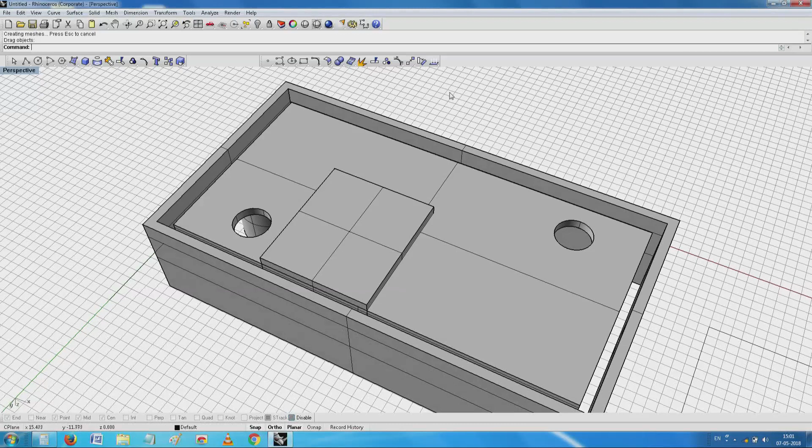So you see here, I have two options. One is build a heat sink in the small gap which I have already shown here. I have a small gap here, you have seen this. So I have two options: I can make a heat sink which is wrapped around and completely goes off inside and gets attached here and then close it, or alternatively, if the amount of area that is available makes the thing easier, all I need to do is make a cover for this device which is completely made of a conductive material.

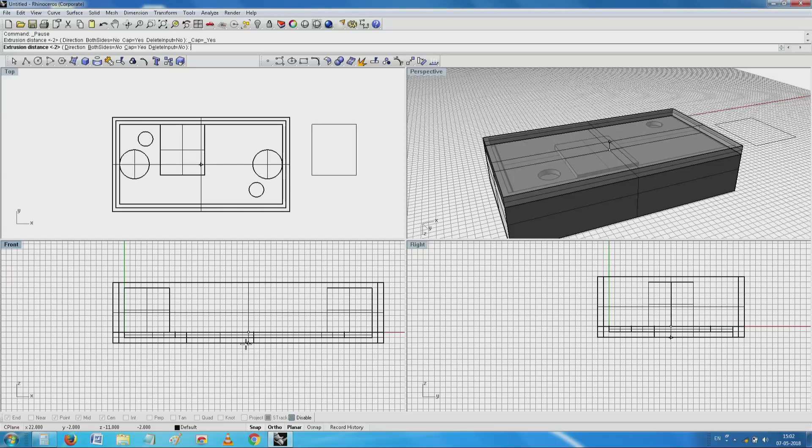See there, it is a beauty. I have now a small aluminum cover which is happily sitting on top of this, and I can play with it. In this case, now more by accident and less by intention, the thickness has become a little more, but still it suits me.

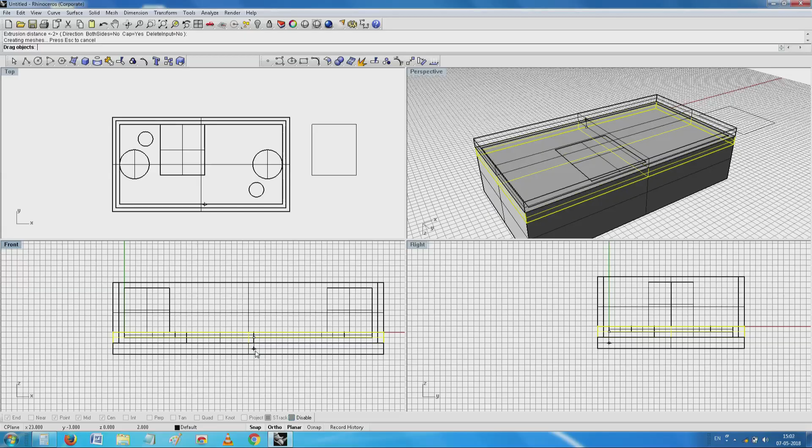You have seen this. Now I have got a cover which is happily sitting on top of it, and at the bottom I have a heat sink, and the whole thing is attached together. Now it is very much possible for me to take this, attach it to this, and union the thing.

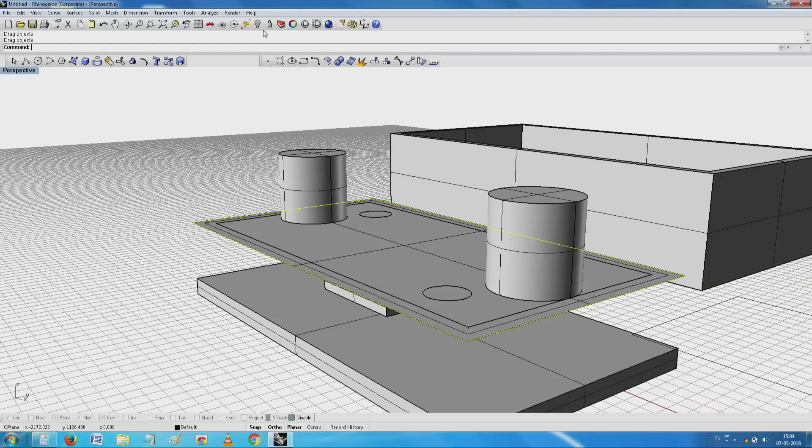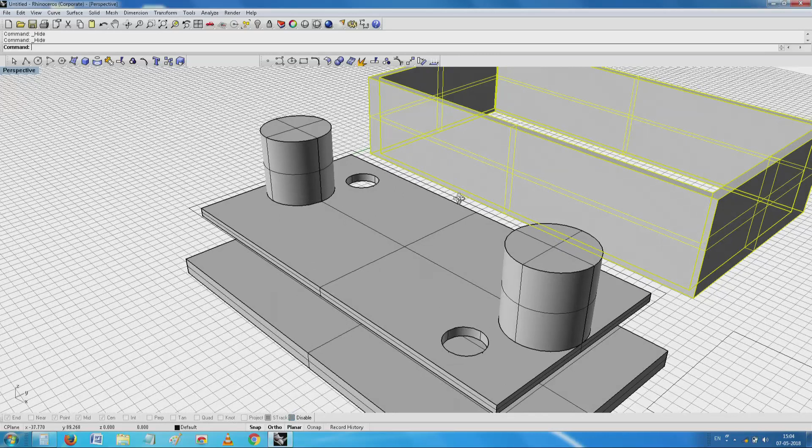See, I have all the necessary things. I have a plate with an aluminum heat bridge, then I have my printed circuit board on top of it, and then I have a cover on top of it. Now from here onwards, it makes sense to figure out how I take the other decisions related to my project here.

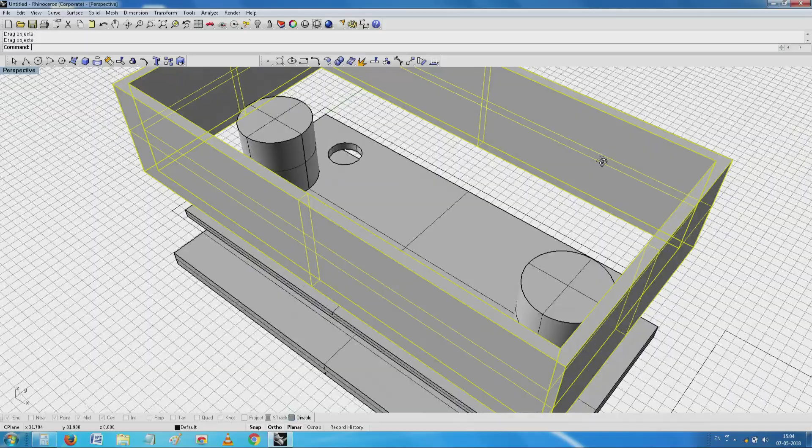Obviously one of the important things is how do I close the whole thing, how do I clamp it. These two are obviously metallic objects, and this is the 3D printed item. All I need to do is make a cover here and probably make some arrangement by which these two mounting holes are there. I get it made in this. I will just show you quickly, and then after that I will take a short break.

You see I have a hole here. I just need to make one more circle. See, I have a beautiful circle here, and I need to make a small pilot hole in that circle and make an extrude.

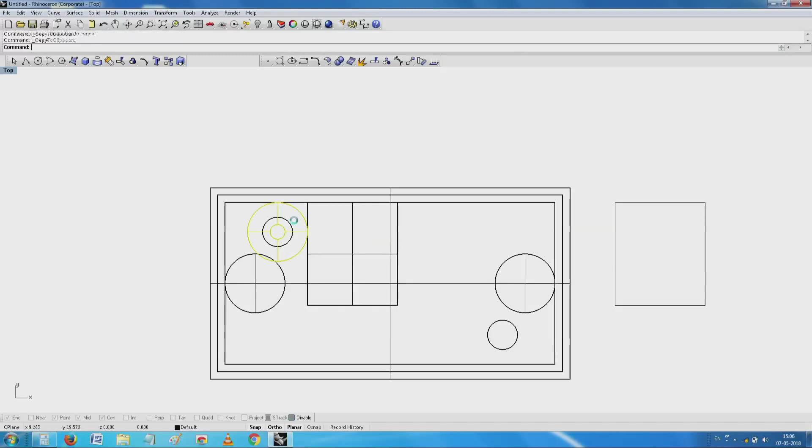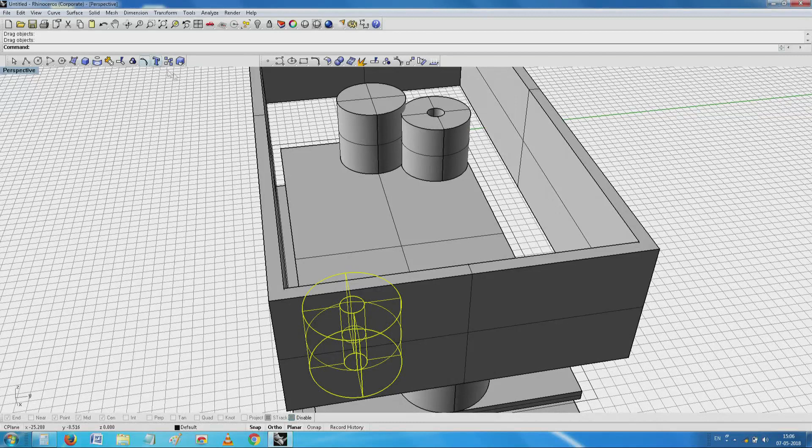See, I have got a beautiful mounting detail here which I can make. See, I have two beautiful circles which are nicely part of this, except that you will notice already the first goof up. I have done a small goof up here. You have seen this. This is interacting there and it may be creating problems for me.

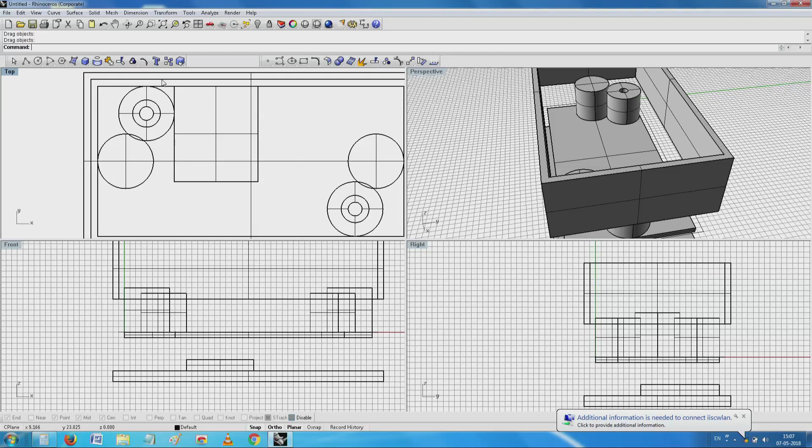That is where you have an advantage when you are working with CAD. Several options: one is, depending on the strength, this is decided. So what to do? You can just cut off this portion, see that it aligns perfectly. Alternatively, I can make this a little smaller, critically small, but then I was hoping this will touch here. So this is where I now try to remove only the details which I need. All other things I will hide. Now start playing with it.

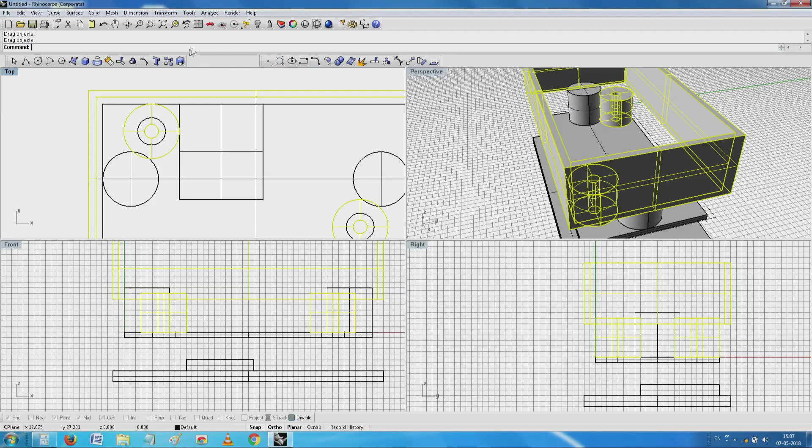See, I have got two mounting holes, I have got the outer thing. I need to do something so these are attached together. So this is where our ingenuity and a little bit of craft come about, saying how do I join them here. In the case of injection molding, if you remember, there was always an issue about maintaining constant thickness. In the case of our thing, that is not the main issue. So it is very much possible for me to just join this here, so that material required from the support point of view is avoided.

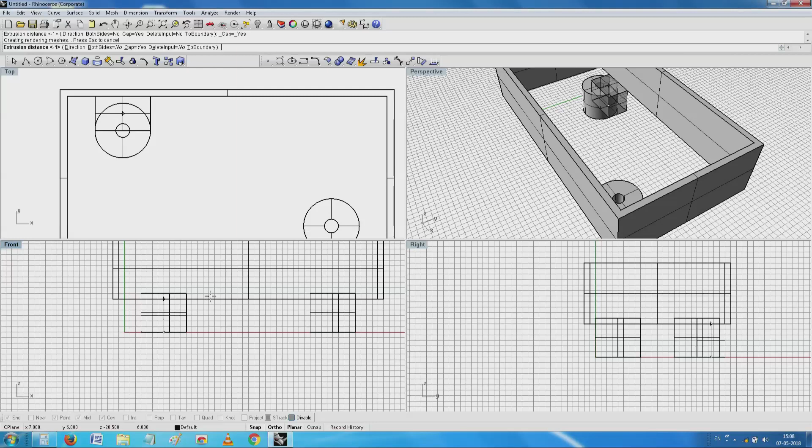So what I will do is now try to make one more small surface, corner to corner I start here, and extrude this. See, beauty. Without too much of a problem, I have this, and then why did I make it solid compared to the other thing?

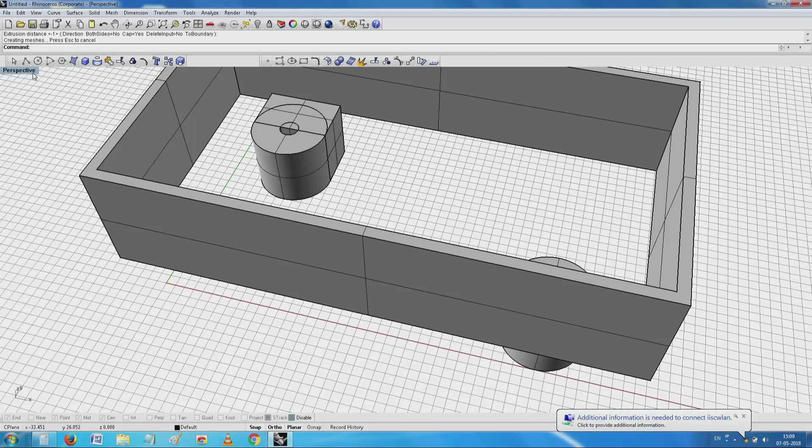This is where one of the detailing which is very much part of any 3D printing is required. If you make parts similar to what you would do with injection molding, we end up with certain priorities which are very different. In our case, we need to maintain such that the support material is not required. The main material is anyway consumed. But in the case of our injection molded parts, constant thickness has to be maintained, otherwise injection does not take place. So I have these two beautiful bosses here, and then I boolean these things.

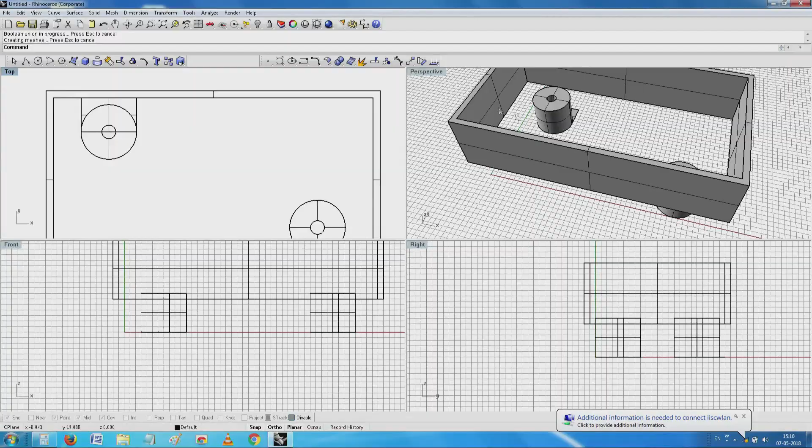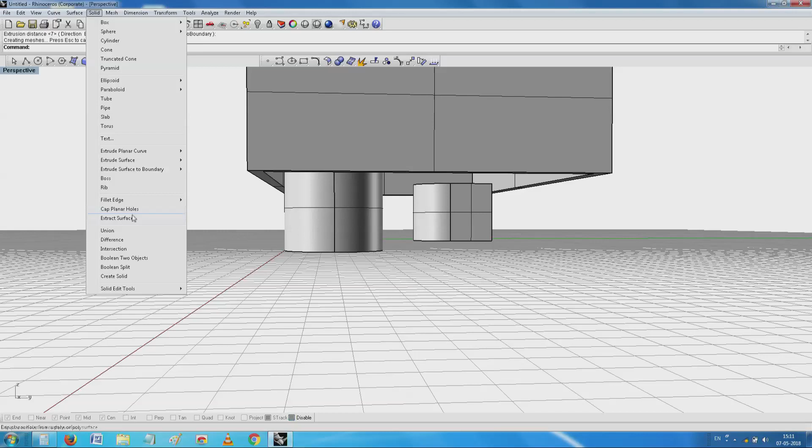That is the right part. I just need to copy that same part here.

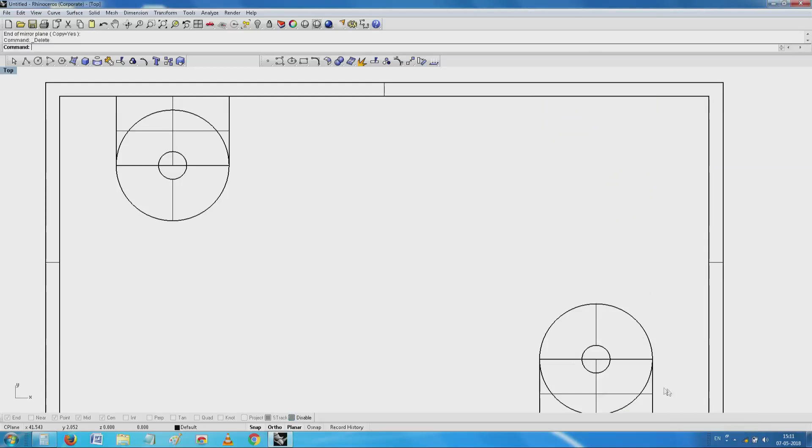Now, because it is a symmetrical object, I did the easier thing. I just went and mirrored it up, and then I will take it up and union this whole job. In case it does not union, I have some other problems.

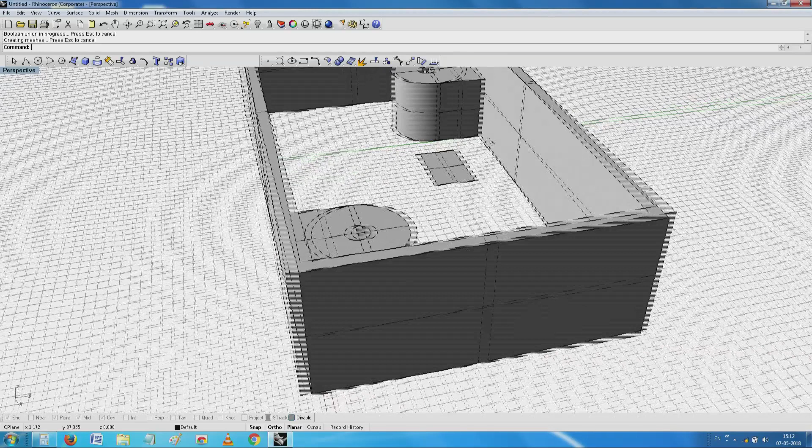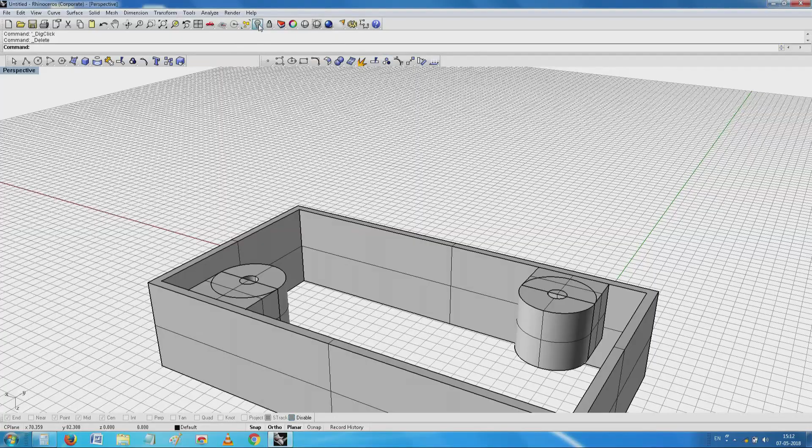You see, my basic structure is ready now. This is all that is required. So, on this, if I now switch on the other hidden layers, I have my printed circuit board which sits on top of it.

You have seen that is a printed circuit board. Then I have the heat sinks which sit on it.

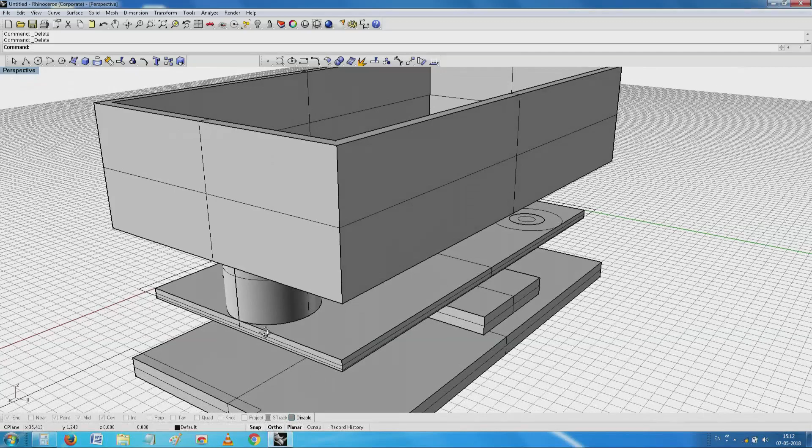Now, if I am careful enough or clever enough, it is possible for me to also use the same mounting hole which is here to come and then clamp all these objects together. Seen this, no?

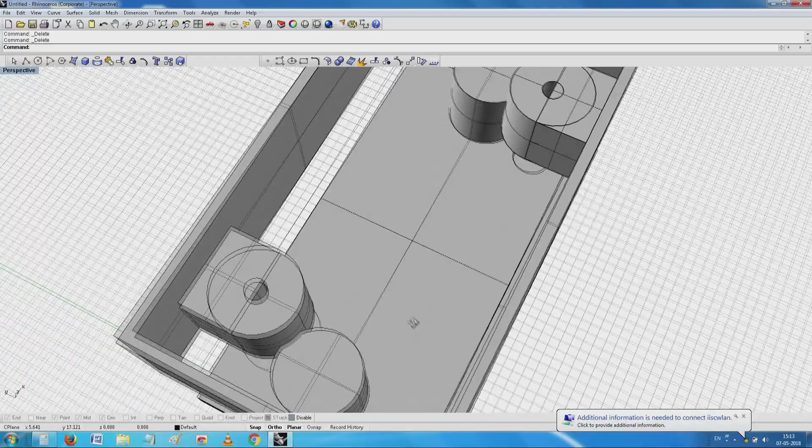It is very easy for me. I can clamp all these objects together. Do not get too much worried about it. I will remove this thing right now.

Slowly, my basic structure is ready. Now, you will notice only one thing - it made sense when I was trying to build it up from this side. Now comes the next thing.

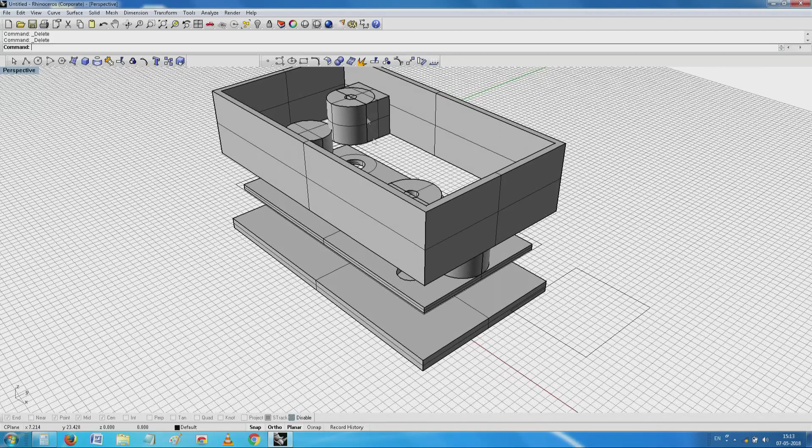Can I now make another cover directly? Can I happily close the other end? You have seen this here, no? Can I close the other end and then complete the job?

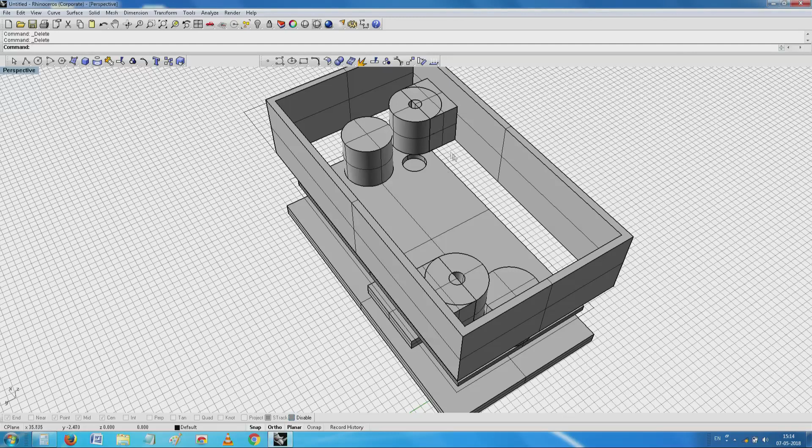So, you see here I had actually, with a little bit of trial, except that sequence did not come properly, I tried to make a gap here. It is possible that if it were a symmetrical object and it is not attached to each other, it is possible for me to see whether this printed circuit board can now be shifted up.

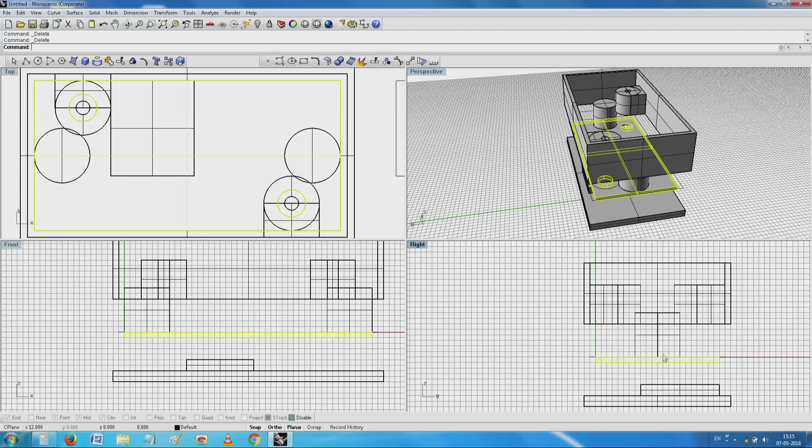Nothing, it is just the sequence - I am just reversing the sequence so that the circuit board sits here, I have both these capacitors here, and then this heat sink and assembly goes on top.

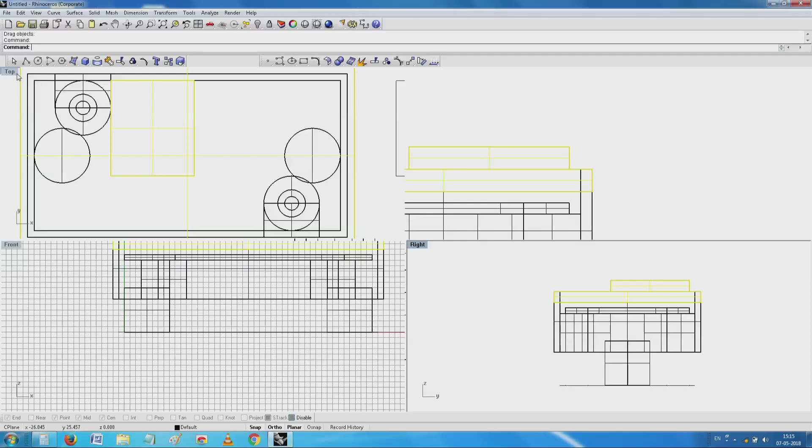And then I see whether I can now do something and invert it and see whether things are okay. You have seen here at least one part of it has been partly taken care of.

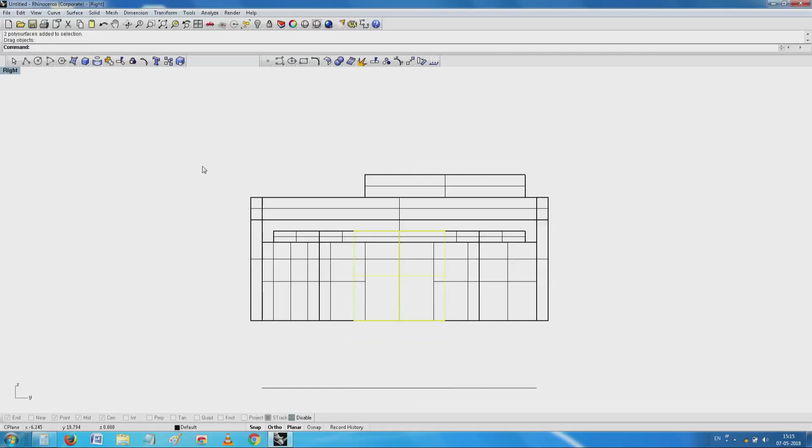You have seen this? It is possible for me now to put the PCB on the other side. I just need to invert it and do the usual little bit of circus.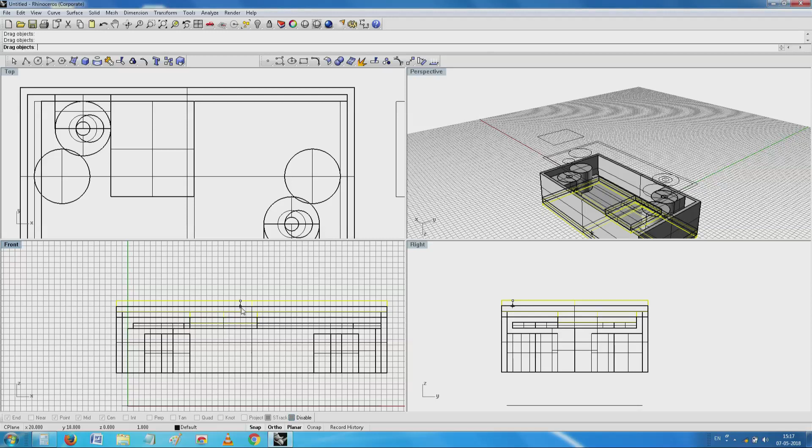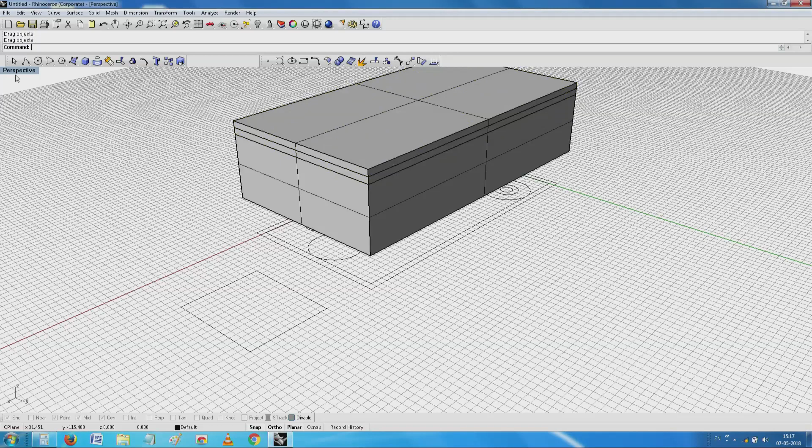Seen this? PCB is happily sitting here, okay. And then on the other side we also have this nicely attached to the other surface, and then I lift it a little and then see it is much better than what we had started. Can you see here now?

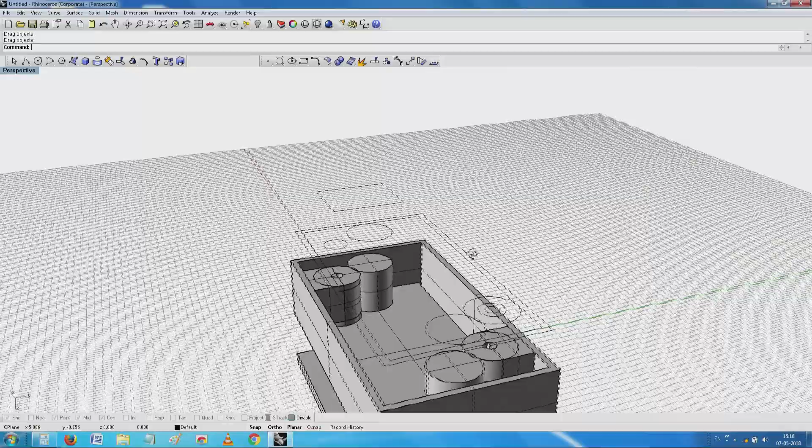In this we have the support structure here, and we have the printed circuit board which is happily sitting on top of it, and on the other side we also have a place for the heat sink. Now it is for me to decide whether I can continue with this opening here, and then when I push all of them together I need to assemble them.

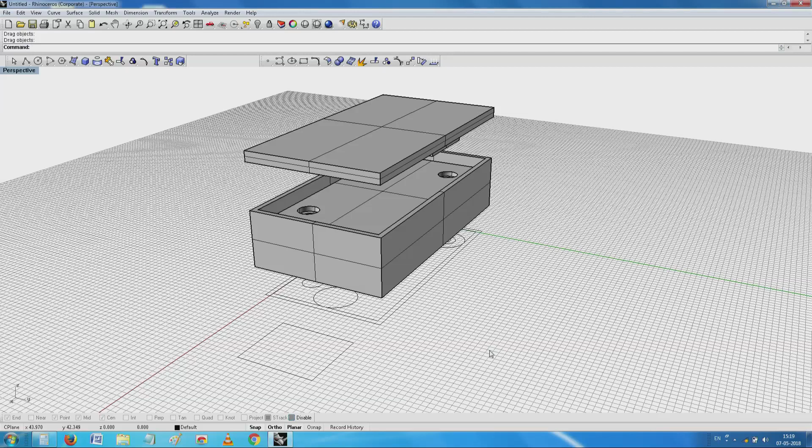Alternatively, depending on whether I need to open it again or it is a one time affair, I can even put a super glue and leave it like that, hoping that there won't be any issue, and that things will happily settle down and get clamped without the slightest problem.

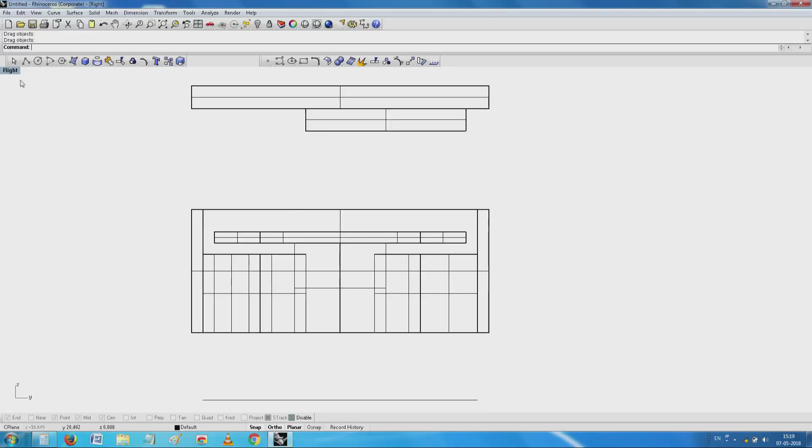See, I have a nice structure, I have the supporting holes, I have the place for the printed circuit board, these are all the capacitors. Later on I will remove the material, I will come back to it a little.

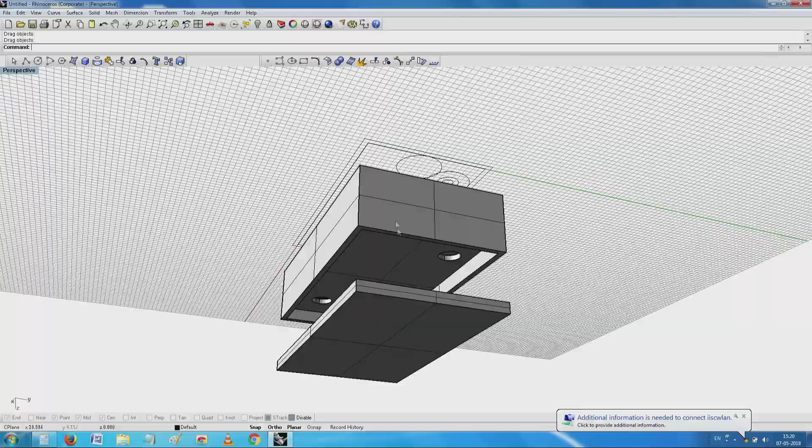Then I have a heat sink which goes and sits and touches on that. If I just transfer these two openings here and close it, now one part of my enclosure is closed without any problem. Life is easy.

Now please, if you come back to this circuit board again, kindly come here. You notice that it has a small trimmer potentiometer here, and this trimmer potentiometer needs access, and then you see there is also a small lower portion there.

Now is there something - this is where, as part of the industrial design, can I build something into it to make it look a little interesting. Easiest thing that can probably be done is to play around and see what best I can do.

You have seen this, I have this that needs to come out. So if I make a step here and an opening here, or do some other thing, the focus all the time is how the support material is used for building up the product. Is it going to be flat, or does it make sense to give a small step and an opening, so that if I have a screwdriver, somebody can open it here. Alternatively, do I give a large knob by which manually I rotate things.

The inside of the circuit is the same. How do I build on this? This looks a little smaller. Do I make a funnel-like thing, or just make what you call a rubber cap, and have a product which can be easily printed here.

So right now I will go here and say what best I can do. Can you see this? So far we have come, this is also there. I have a provision for a heat sink. On the other side, this is where now do I just make a simple cover or add a bit of an element of design into the cover.

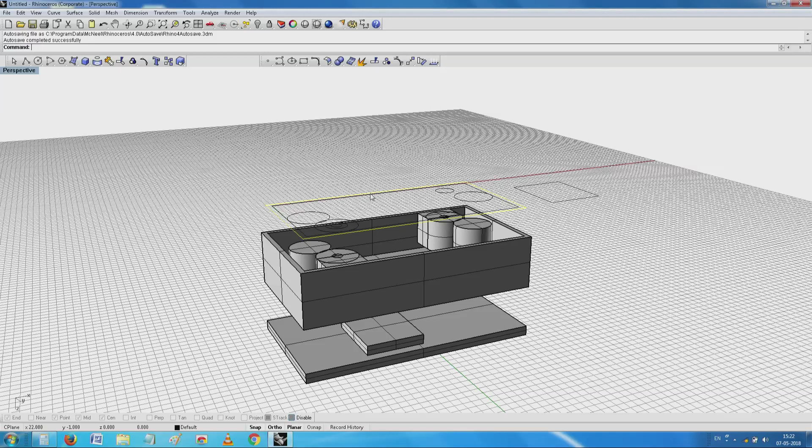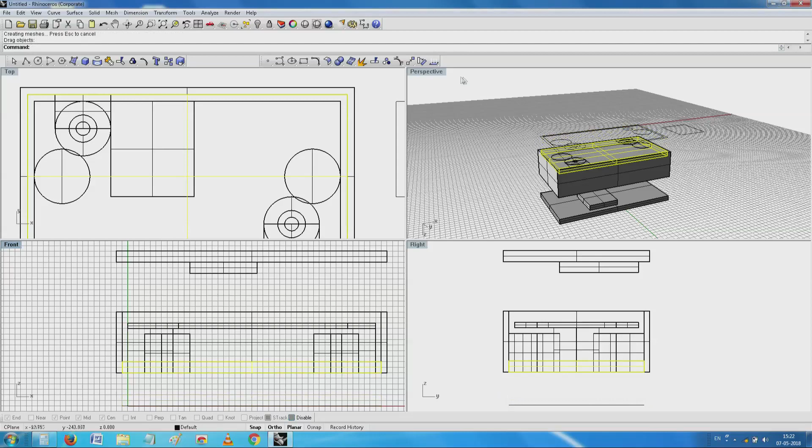Simple cover will be very easy to make, absolutely no issue at all. I just take it, extrude it, looks okay, no? Do I make a small opening on it, or do I now play around and say what best I can do with it? Can I give a small element of surprise in it? So I will take this side view of this small cover.

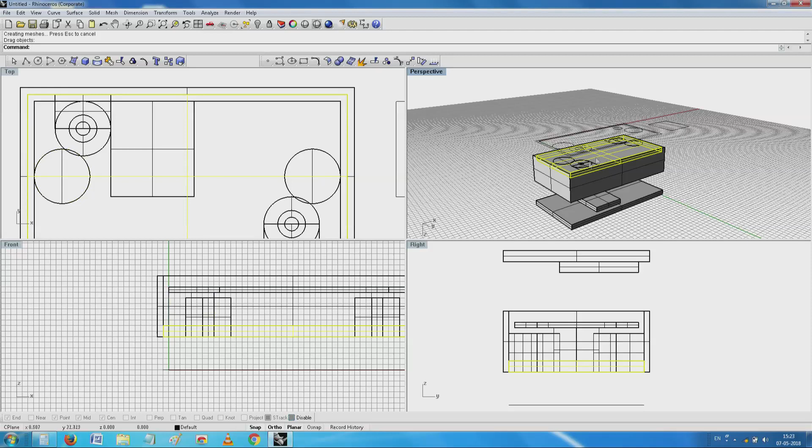Have this profile. Is there something I can do with this profile? Yes. Probably the easiest thing for me to do is once again start with a line, or in this case I will start with a very interesting line like this, bring it up to here. Somewhere here I notice that...

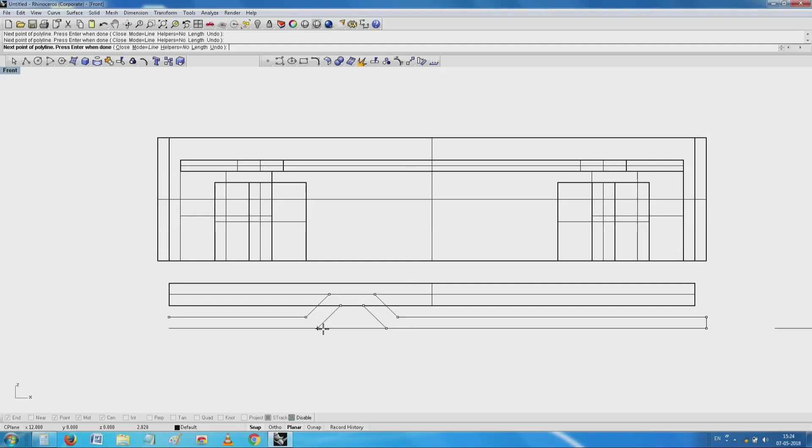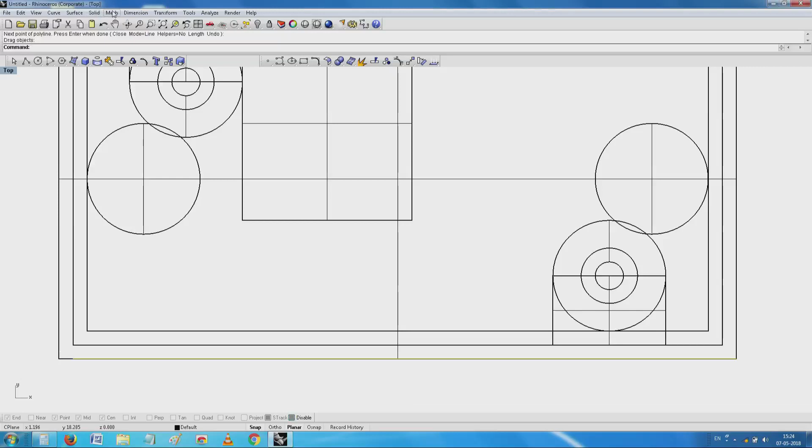See, I have got an interesting profile that I have built up there. It's not actually a gimmick, but whether I can build some useful element of interest into this project.

Now you see here, if you look at it on the other side, I have got a small step there. Instead of this uninteresting flat object, I have got something which has got a small step in that. Makes sense. So I just need to provide a hole, and such a thing is not impossible to build. This is where that angle business has come.

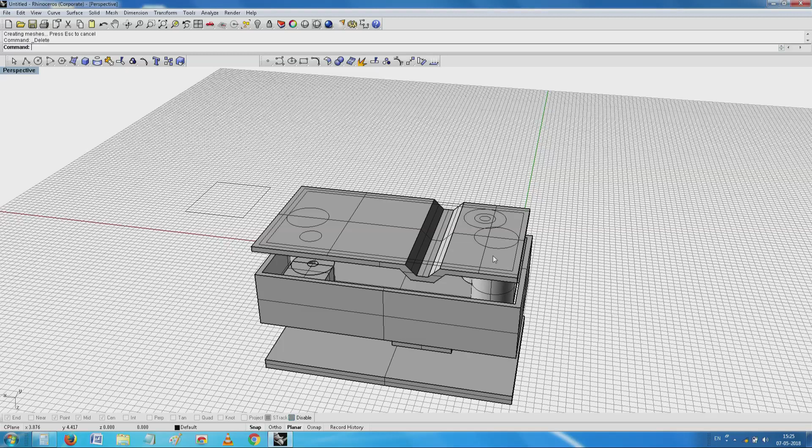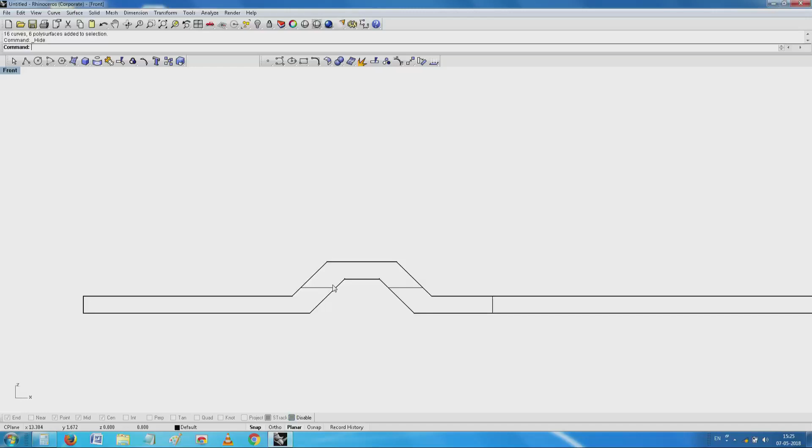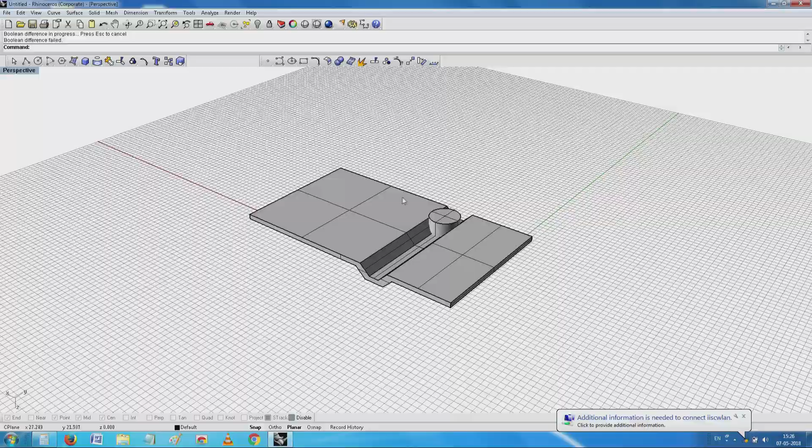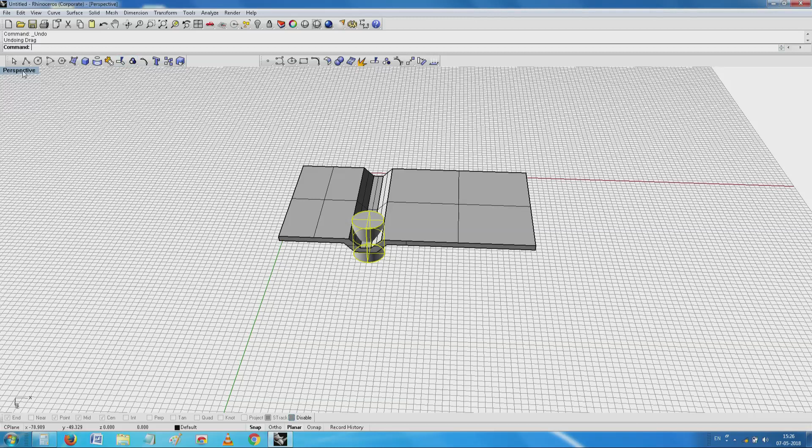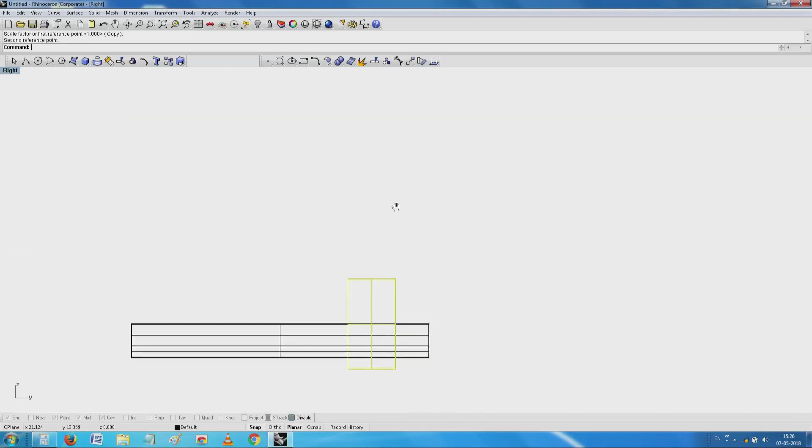It says Boolean difference has failed. Probably there is some issue with it which I am not able to solve yet. Eventually it is possible for me to make an opening here. Mostly what has happened is that the proportions of that object are interfering, and I need to make sure that it does not intersect in the inclined portion. Yeah, that could be the problem.

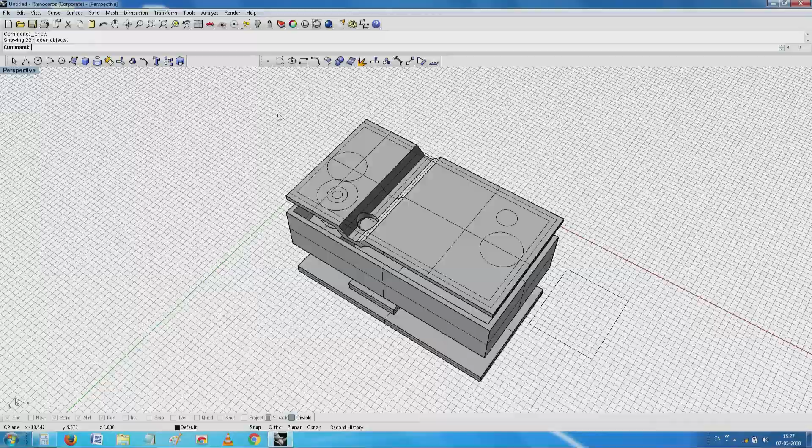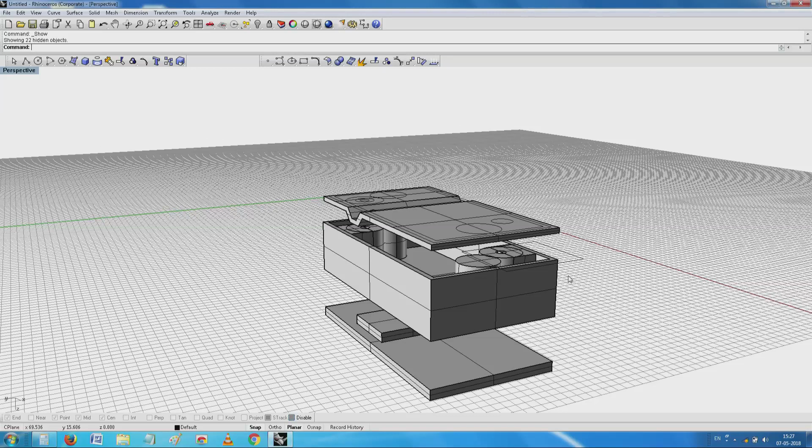Now you see here, I have an opening here. Then if I unhide all the things, slowly my box is getting ready. Okay. This can now be happily unioned to this portion, so that I have a nicely, beautifully sitting box. So this and this form one complete enclosure.

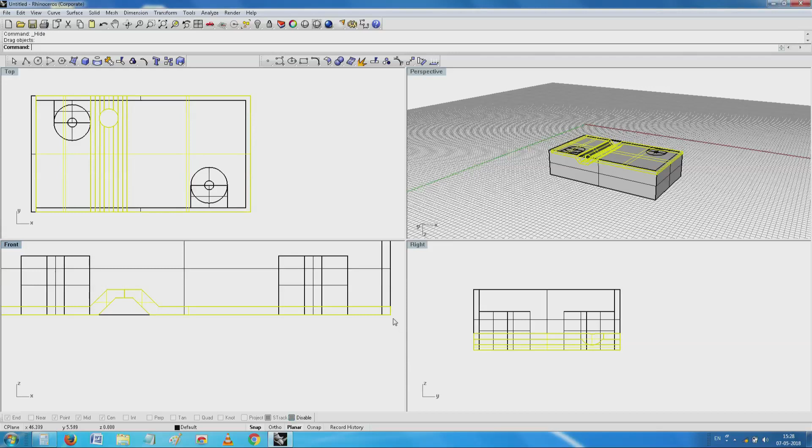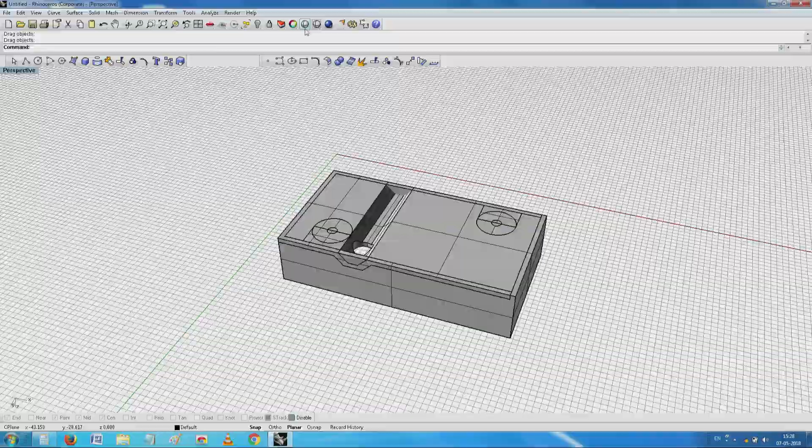Nice, isn't it? So it has all the elements of having protection and then having anything. I have a nice box, it is also protected, and there is a place for me to put the printed circuit board. There is an opening there, so that I can tune the circuit, and my this thing is ready.

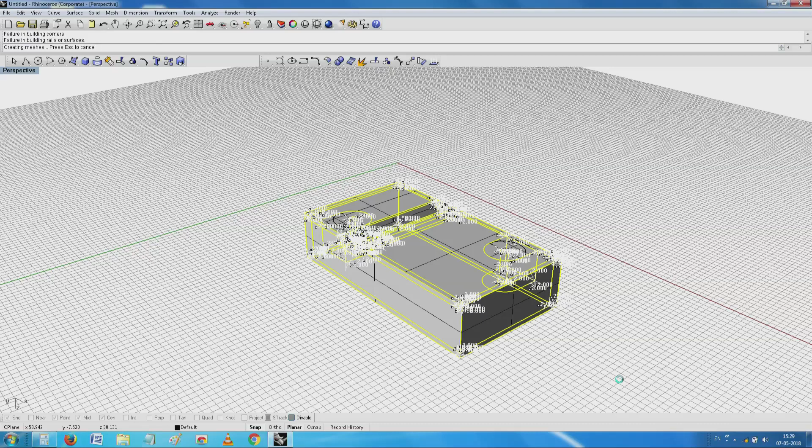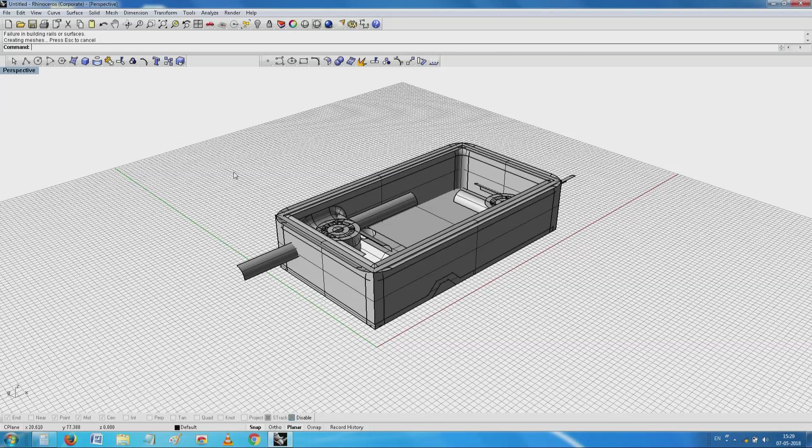Just to make it a little more presentable, I can just give a small edge fillet of the order of say 0.2 mm. It has failed, sorry. Oh, sorry. Yep, finally it is here.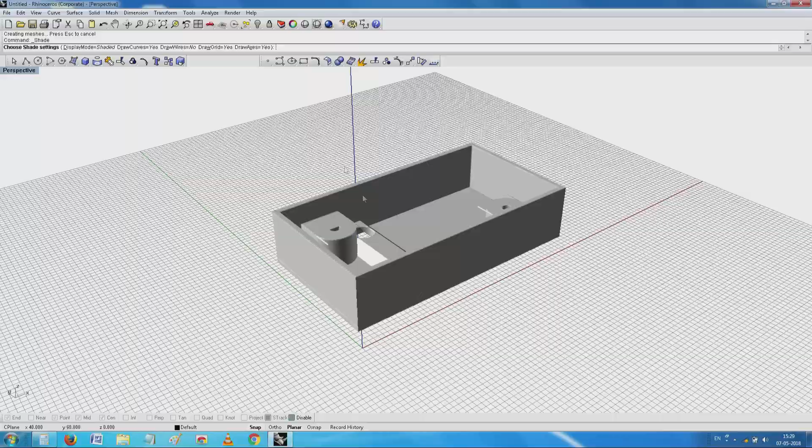Now if you see this object, this is likely to be a slightly better thing. You have seen that all the elements have been covered. I have a beautiful box, and even if you see small detailing here inside, it looks fine. Seen this? And now we can just print it.

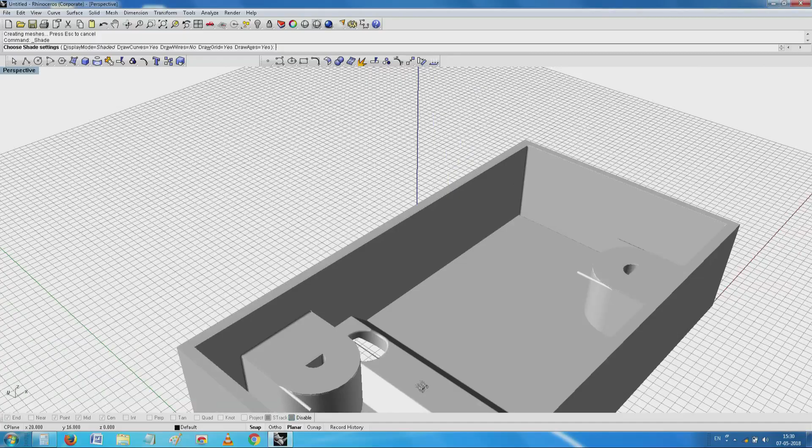Only one small thing is this has been done only to make it visible and convenient to the eye, because the edges are the ones that catch the highlight and you can see the object. In reality, any fillets are a problem in building up in rapid prototyping, so we generally do not give fillets.

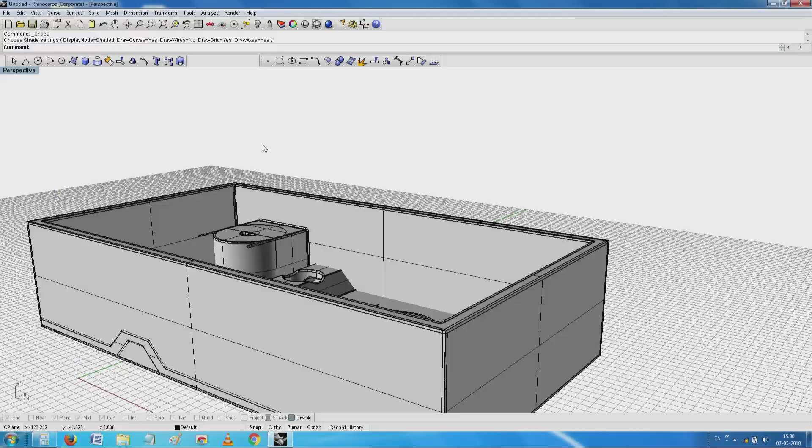This is going to be the final object, and now if I switch on all the other hidden objects also, I have a printed circuit board which goes inside. I have this heat sink, and the whole thing is a product now. Now this heat sink again, how do we do it? Do we use some other way of making or anything? That is up to your thing.